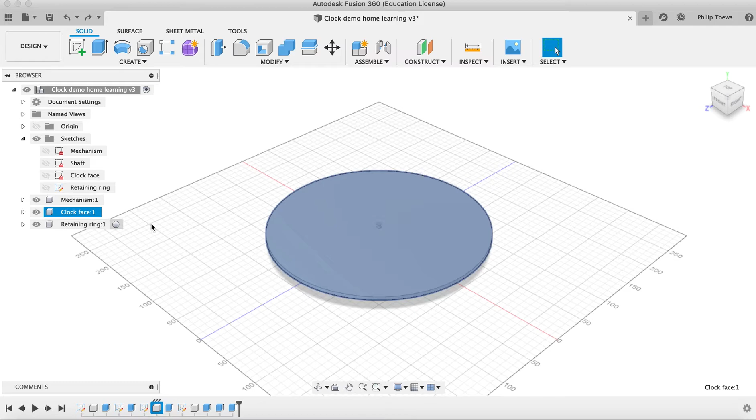At this point, we've now got our mechanism and our clock face, and we've got a retaining ring which is able to double as a wall hanger, and that's great. But if we look at our project, especially if we look at that retaining ring, you can kind of see we might have a bit of a problem.

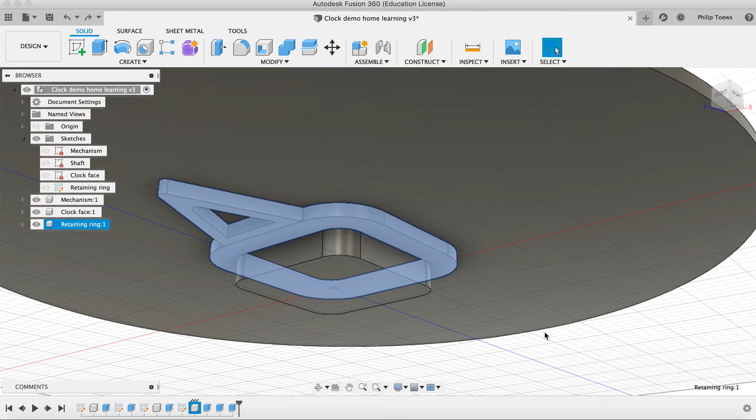That's not really thick enough to hold the mechanism in place. The mechanism is pretty fat and the retaining ring is really skinny. It's not going to work. I need more copies of this retaining ring. The retaining rings will all be cut out of flat material, so I'm going to have to make duplicates of them and then stick them together, glue them together, to build them up to the thickness that we want.

So how do we do that? Well, it's relatively easy. In this video, we're going to learn how to make copies of components and then how to joint them in place so that they always end up where we want them.

To do this, I'm going to invoke the move copy command. Move copy can be brought up by pressing the M key, which I'm going to do, but you can also do that under Modify, under Move Copy. So there it is, and you've also got it up on the toolbar with this handy dandy tool here. I click there and it says move object, and you can select different kinds of objects. In this case, I want to do a component because most of the things I made were components.

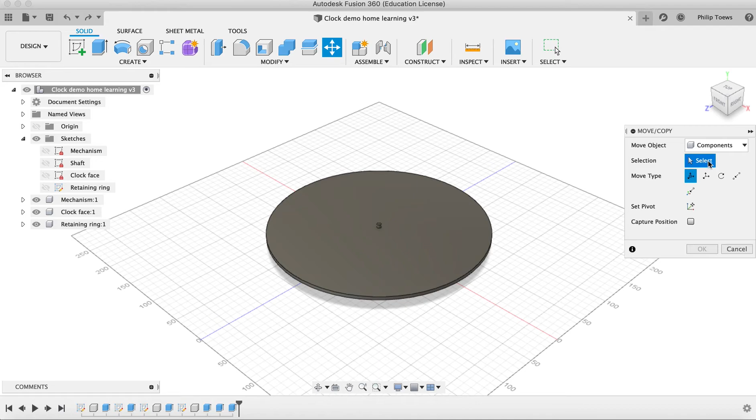It's asking me to select a component, so I will select the retaining ring. It highlights and says OK. Now, here's the trick. Down here at the bottom of this dialog, I'm going to say create copy, and it will do that.

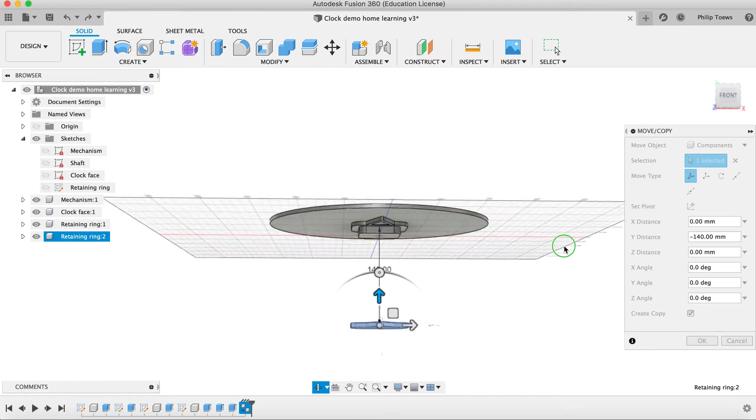As soon as I've said create copy, it gives me the move reticles here, and I can move this stuff up and down. I'm just going to move it way out of position here so I can clearly show you that I've made a copy of it. I'll move it way down and then say OK.

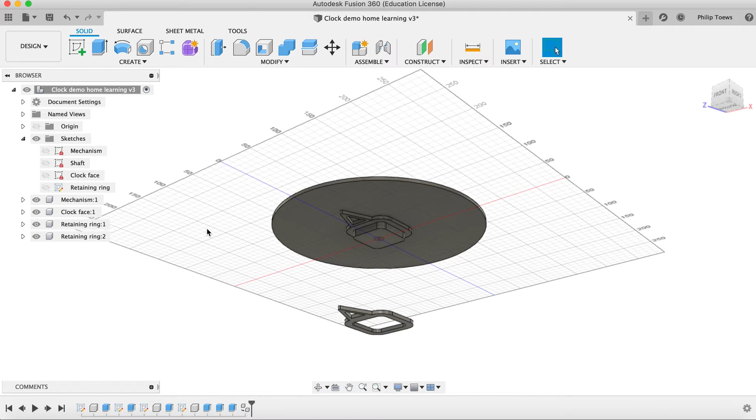So now we've got one retaining ring wall hanger thingy, and we've got another one sitting there. They're over here in our data tree - we've got retaining ring 1 and retaining ring 2. What I need to do now is connect them together so they are always stuck together, to show what it'll be like when I glue them together. All right, so here we go.

Let's do it. I'm going to now joint them together, and I go under the Assemble menu and say Joint. I click Joint, and the first thing I want to do is, from the first component that I want to joint, zoom in and choose a spot on its surface.

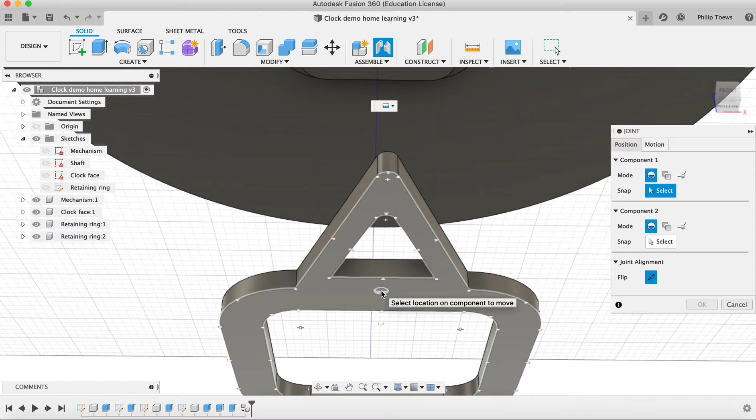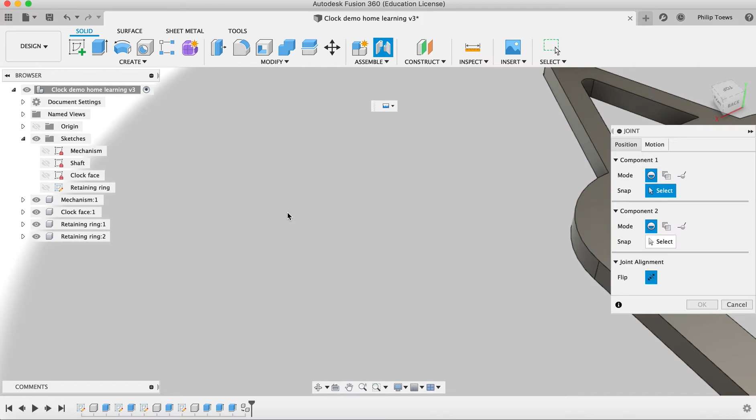You'll notice that as soon as I mouse over the sketch profile, it changes, and I've got these little triangles all over the place, and I've got this half moon shape. That half moon shape is the beginning of the joint. So I'm going to join this - hang on, I'll move it into position here, just need to move it over here. There we go. Okay, I want to snap that thing, and you can see where it snapped in.

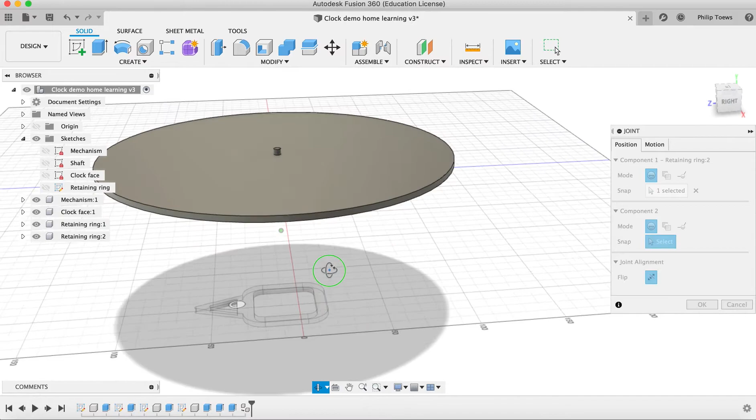That little half moon shape went there, and I click on that, and it went transparent, because it's saying, all right, I know where to start. I need to joint that thing there, and you'll notice I went to the underside of the retaining ring. I want to join the underside of that up here onto this one.

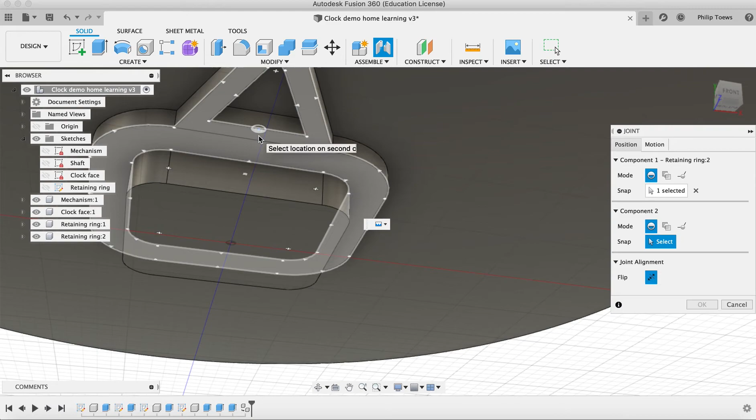I want to snap it in there. As soon as I click component 2, you'll notice I've already identified component 1 over here, you can see it all there. Component 2 now, I need to identify where on component 2 I want it to snap to. In this case it's going to go right there, and as soon as I click it's going to move into place. So watch the birdie, I click it, and boom, it snaps into place.

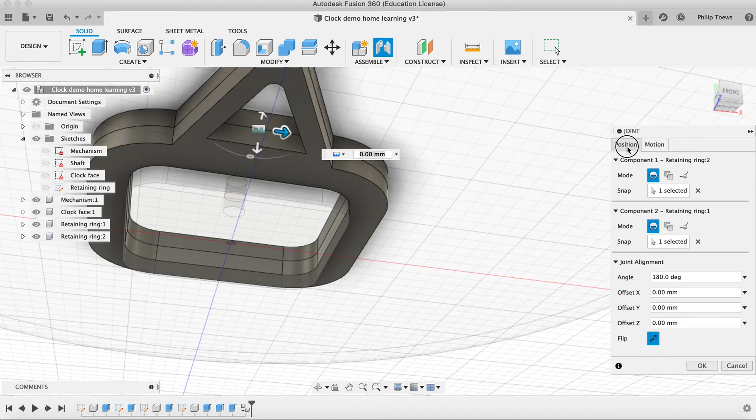Now it's got this icon here, the joint icon for a rigid joint, and that means it's going to act like it's glued together. If I click on the Motion tab, you'll see all these different kinds of joint. The first one is a rigid joint, meaning it's not going to move. It's rigid, and that's what I want. That's going to imitate what gluing it together would be like. I say OK, and it's done. That's lovely, I've done it. I've moved my second retaining ring into position.

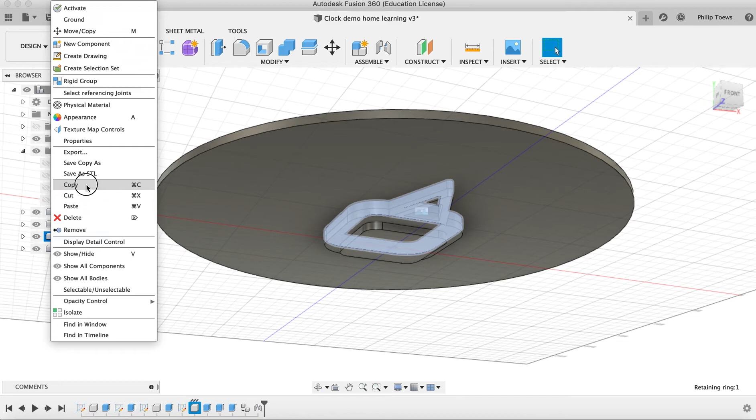It's great, I could continue this if I wanted to and do a variation of that. So I go up to retaining ring 1, and I'll make another one. I'll say copy, and then here I can say paste instead of bringing up the move copy command. It's going to do the same thing, but let's do this variation of it. So I say paste, and boom, it's asking me to do the same thing. I'm just going to move that out of position for now, and I'll say OK.

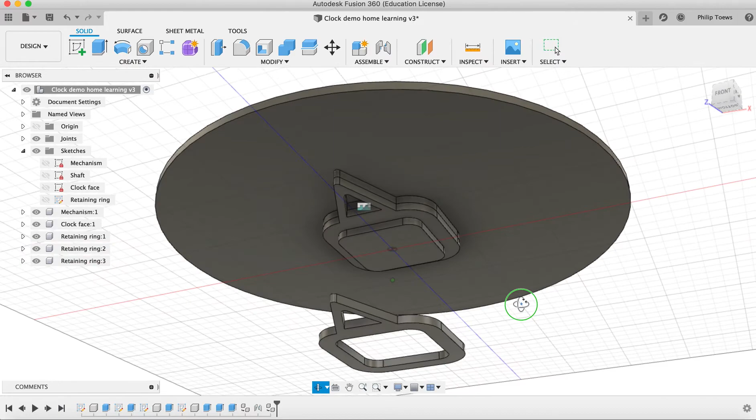Again, I'm in the situation where I've got this thing floating in space. I don't want that, let's joint it together. So I go to the Assemble menu, I say Joint, and then on the underside there, I'll zoom in so I can see it. I want it to go from that position right there. I'll zoom way in, there it is. I snap there. And now it wants to know, okay, well that's the beginning of the joint, where am I going to end up?

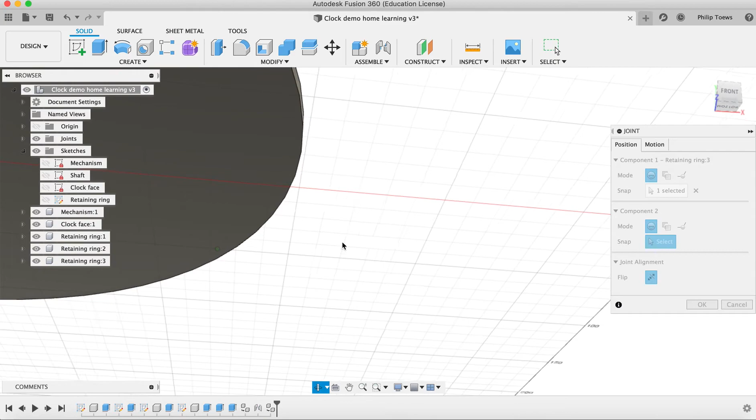So I'll zoom out and zoom way in to where I want it to go. I click again, and it moves it into position, and shazam, we're done. Okay, so now I've got my 3 retaining rings in position. They're all jointed together. Let's test it.

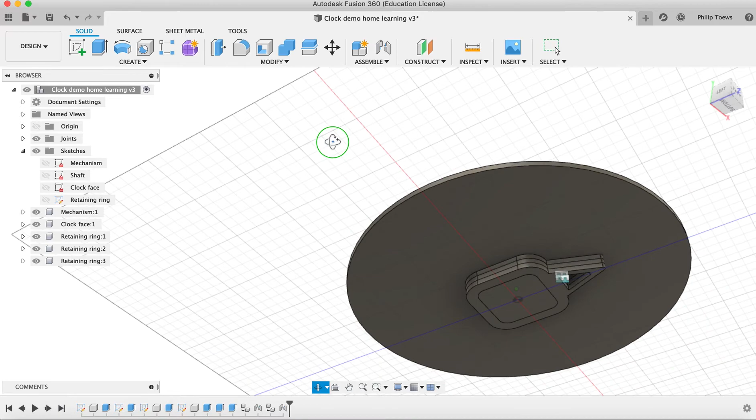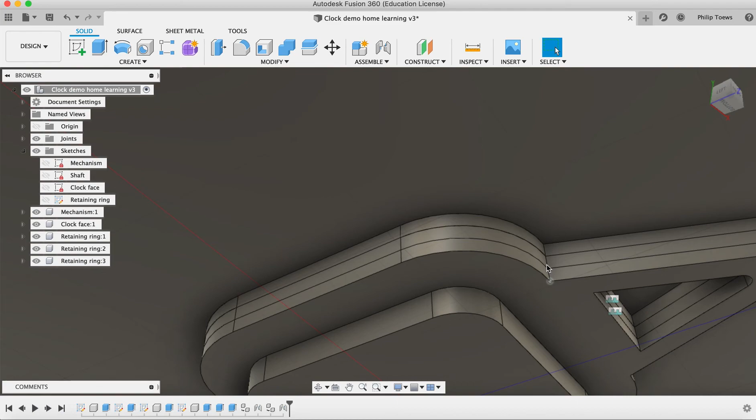Let's see if that actually worked. So in order to test it, I'm going to change the thickness of my material. Because if I change the thickness and make it thinner or thicker, those parts should move together now. So the thickness is currently set at 5. I'll set it at 3, and I'll say OK. And look, they all stayed together. They're all still stuck together because they're jointed. So the bottom of one retaining ring is stuck to the top side of the other one, and they'll all keep moving together just like that.

So there we go. How to copy things and joint them together so we can snap them into place in our designs. All done.